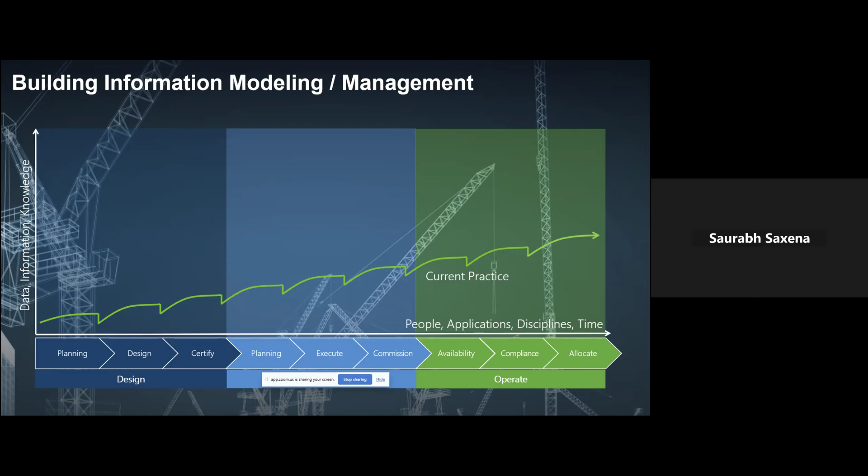So, what do we achieve with that? I mean, the 3D BIM model at the concept stage or visualization stage serves the purpose of data, information, and shareable knowledge between the different people, applications, and different disciplines, along with the time across the project life cycle seamlessly. You can see that in current practice, there is loss of data which results in a lot of rework. But with the connected data environment, the value of this data, information and knowledge sharing increases significantly.

However, the accuracy and details of the 3D model, I am not saying that these can be achieved at the visualization or concept stage, but this can be improved towards the fabrication stage. As you can see on this slide, at the lowest level of detail, 3D models are used for basic visualization and conceptual design. And as the model develops, they are used for conflict resolution, identifying and resolving clashes between structural, mechanical, and plumbing or electrical.

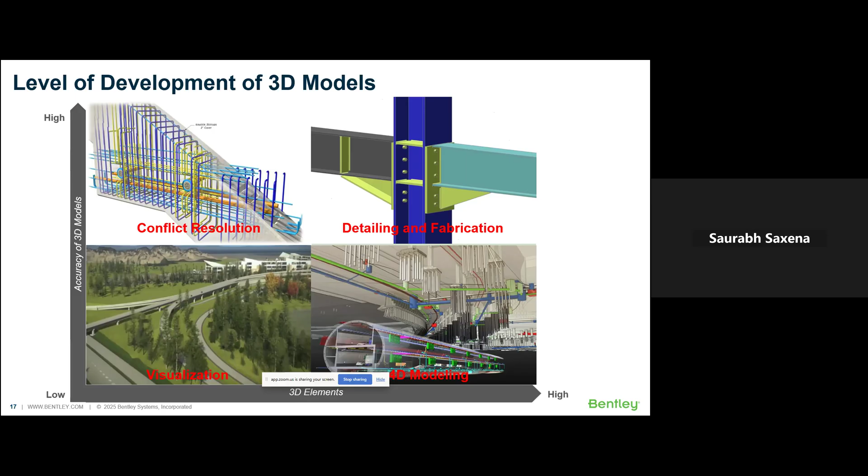And the highest level of detail you can see at the top, that is detailing and fabrication, where the models contain precise information for manufacturing and construction. And if you integrate time as a dimension, then it becomes a 4D model which can be used for construction management as well.

So by now you would have realized that with OpenBridge Modeler, we are trying to achieve, or we are achieving, a connected data environment, that is a seamless workflow irrespective of the discipline and location of the project, people throughout the project life cycle of design, build, and operation phases.

Now, before diving into the OpenBridge Designer integrated workflow, let's have a look at the current disconnected bridge workflow, which you might agree most of the companies are currently following. So what we are doing currently, mostly, is engineers are doing the analytical model and they are designing. Then after designing, whatever results and sections they are getting, they manually transfer the data to drafters. Then drafters produce 2D plans, production, then quantities and detailing. And then that data, after compilation with the engineers and drafters, we manually transfer for the construction and asset management.

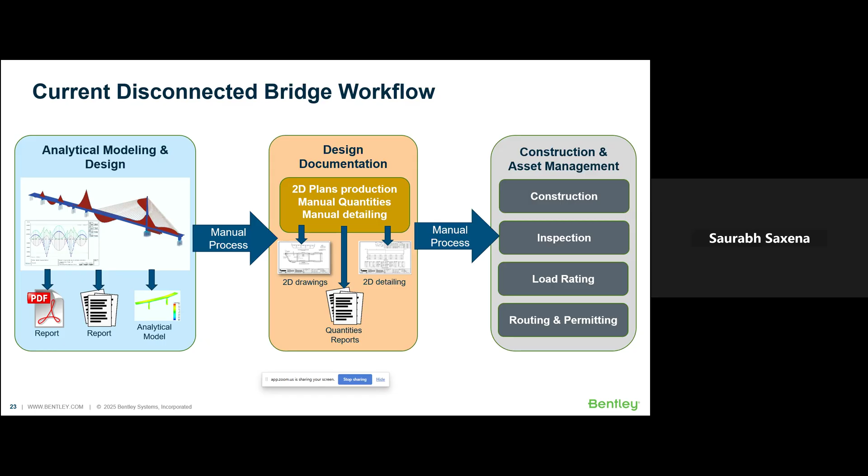But you all have experienced in your tenure as a structural engineer or bridge engineer that this results in a lot of data loss, as well as a lot of rework. And the most critical condition arises when one of the engineers or drafters leaves the company, then it is very difficult to gather that correct data.

Now coming to the OpenBridge Designer integrated workflow. So what is OpenBridge Designer? OpenBridge Designer is a unique application that combines modeling, analysis, and design into one comprehensive bridge product, as it creates a true BIM model, that is a 3D physical model of your bridge from the beginning of your project. The application utilizes the modeling capabilities of OpenBridge Modeler. I repeat, the application utilizes the modeling capabilities of OpenBridge Modeler. There you cannot design and analyze.

And the analysis and design features mean you can design and analyze after extracting that physical model to either LEAP Bridge or RM Bridge, that is LEAP Bridge Steel, LEAP Bridge Concrete, or RM Bridge. So you can see in this slide that we can do the 3D physical modeling. The same model can be extracted for analysis and design, and then the same model can be updated in OpenBridge Modeler for design documentation and geometry reports, 3D models, and annotated drawings. You can also use that same model in ProStructures for detailing the reinforcement, and then the same model can be transferred for construction and management activities.

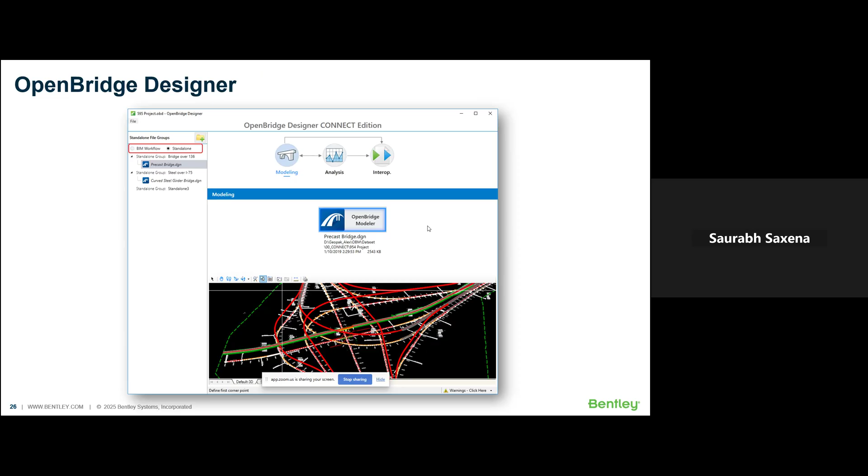You can only create a 3D model, but in standalone workflow, you can even take that model for analysis and design. So in standalone workflow, you can create several groups, and after creating the group, you can create your 3D model in modeling, that is OpenBridge Modeler, and then take that same model for analysis using various tools available in OpenBridge Designer, and these are interoperable.

I mean, the movement can be to and fro. You can take your model from OpenBridge Modeler to analysis tools, and you can update the analysis and design model back to OBM.

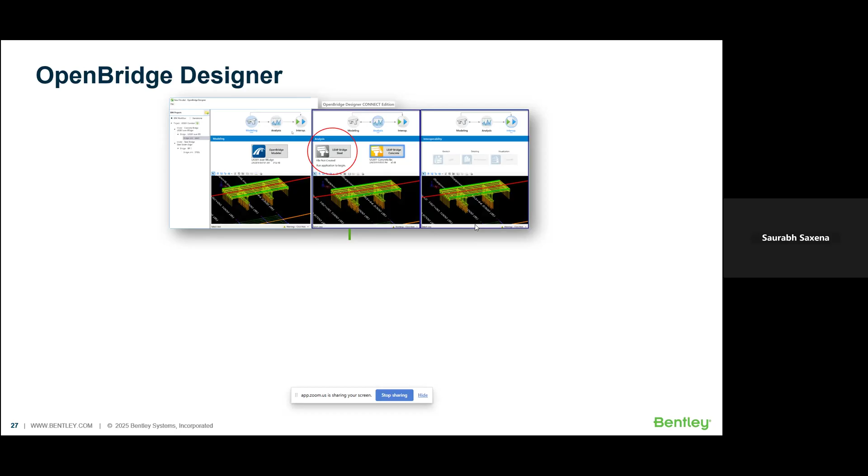So this is the general workflow of OpenBridge Designer. First, you create a model in OpenBridge Modeler. Then, if it is a steel structure, you transfer the same model for analysis and design to LEAP Bridge Steel.

Or if it is a concrete structure, PSC or RCC, you can transfer your model to LEAP Bridge Concrete, where you can do analysis and design. And if it is a complex structure involving many construction stages, like segmental bridges, then you can transfer your model to RM Bridge, where you can design the most difficult bridges you can imagine.

So this video is a depiction of creating a PSC girder bridge on OpenBridge Modeler.

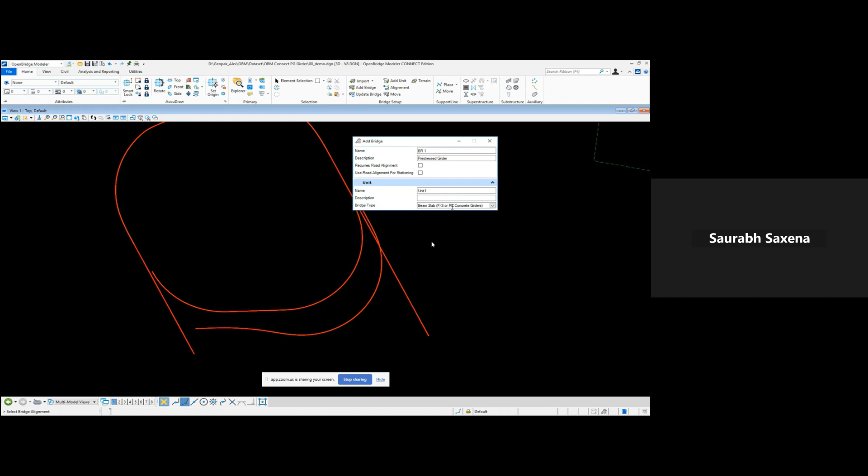First of all, these three lines you can see on the screen are actually the alignment and profile. So for creating a bridge model in OpenBridge Modeler, you need to reference the alignment and profile from the roads department.

After that, in bridge setup, you need to add the bridge. Just select an alignment on which you want to model your bridge. So I have selected the alignment.

You can also reference your terrain model here in OpenBridge Modeler. So all the roadway data can easily be referenced here. See, I have referenced the terrain data as well.

So I have referenced my alignment, referenced my terrain data, and defined my bridge on the rightmost alignment. After that, you need to place the support lines. What are support lines? Support lines are basically the location of your abutments and piers.

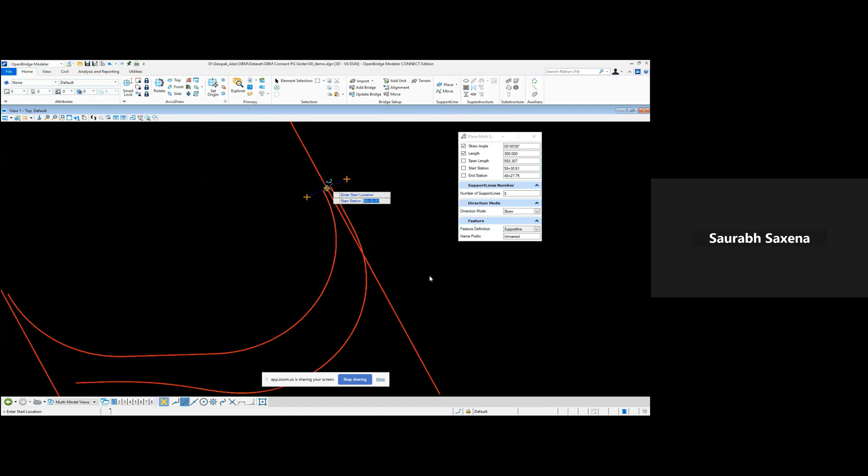So after defining the bridge, that we have defined that prestressed girder bridge we are going to model, we are defining the support lines. Here you need to specify skew angle, length, span length, start station, and end station.

At this point, you need not worry even if there is any change in the spans in between. Just click on this, and this pop-up window will open. Here you can change the name, like A1, P1, P2, and change the span length, so automatically your bridge will set up to the desired location.

Okay, so we have created the support lines for a 7-span bridge. Now you need to place the superstructure.

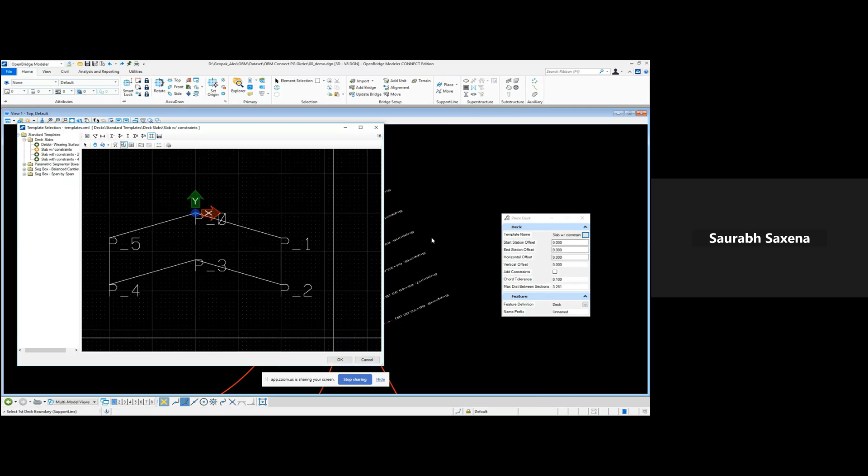So in superstructure, first select place deck. There are various templates available in the library, which you can select from. And if you want to change anything in that template, you can go to the utilities library.

There you can already see some predefined variables, like P1, P2, P4, P5, which are points defined with respect to the origin point, P0. So if you want to change the right half deck width, left half deck width, or slope, you can change it easily from this table.

So here it is as defined. In addition to this, if you want to define a deck type that is not in the library, you can create your own template as well. There is no restriction for that; you can create your own template and define it.

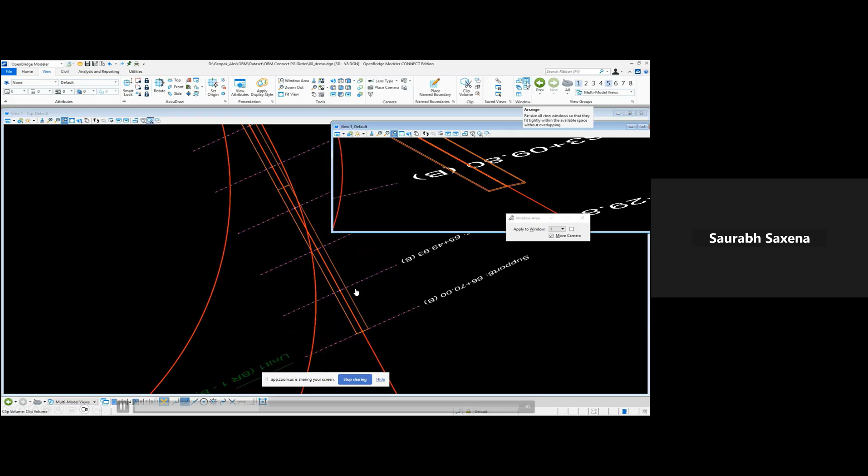So if it is a simple bridge, you have to select each and every support line for placing the simple deck. And if it is continuous, just select the first support line and last support line, then your deck will be placed. As you can see in the 3D view, I have opened two views, one on the left side and one on the right side.

So you can easily place your deck. Now you need to select your beam layout. The moment you select the support lines, this window will pop up, asking how many beams you want to place and what edge distance you want to keep on both edges.

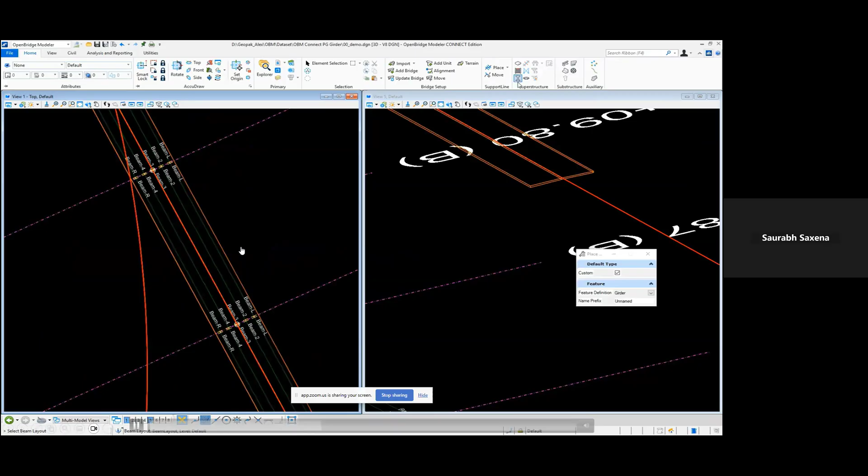You can define that, and even change the beams in between - right beam something else, left something else, intermediate something else - that freedom you have. Just select the beam layout, then you can place the beams. In this pop-up window, you can select the templates or change the template as well.

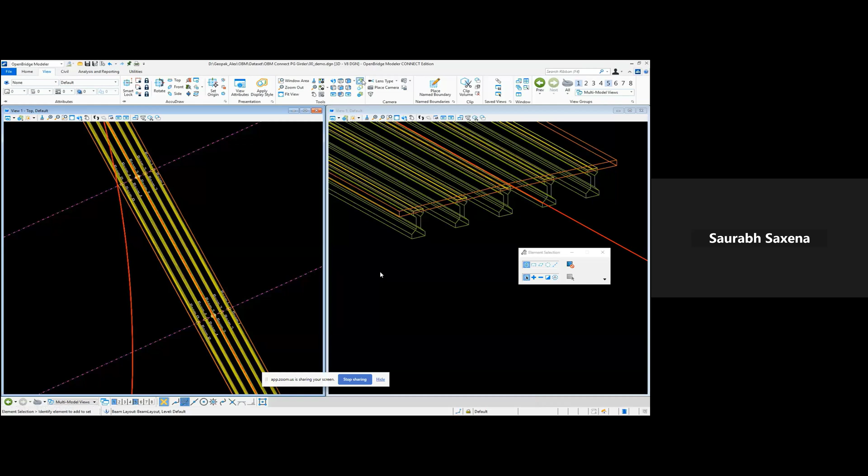So now the beam is placed. You can see in the 3D view, and you can change your view as well - from wireframe you can change to illustration view. There you can see the solid representation of the various components of the bridge. So here you can see what we have modeled till now.

After placing the superstructure - deck and beam already placed - now comes the part of placing the substructure. Go into substructure, select place abutment, select the template. There are various defined templates in the library, and if it's not as per requirement, you can create your own template as well.

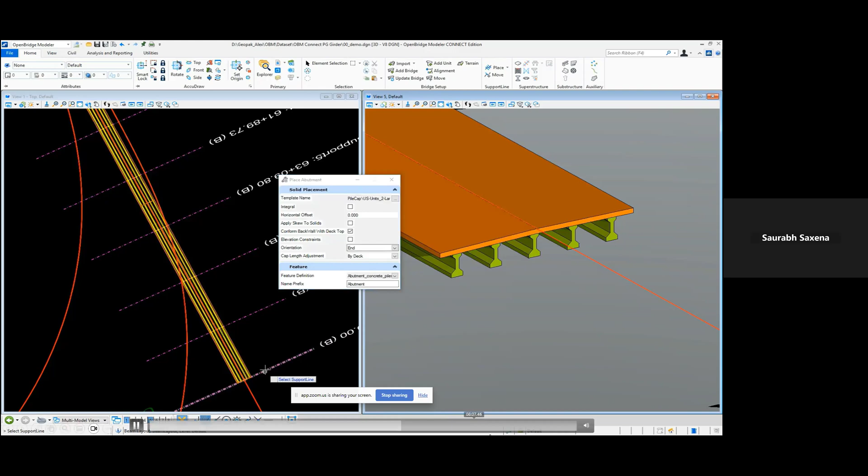You can select the template name from this pop-up window, and horizontal offset if any, conform back wall with deck top, elevation constraint if you want to give. If you have referenced your terrain model, you can give elevation constraint and orientation, whether you want to place your abutment at the start or at the end, and cap length adjustment. You select all these parameters and simply click on the support line where you want to place your abutment, then your abutment will be easily placed.

Same again, you need to change this orientation to start. If you want to place your abutment at the start location, just select the support line again, and your next abutment will be placed.

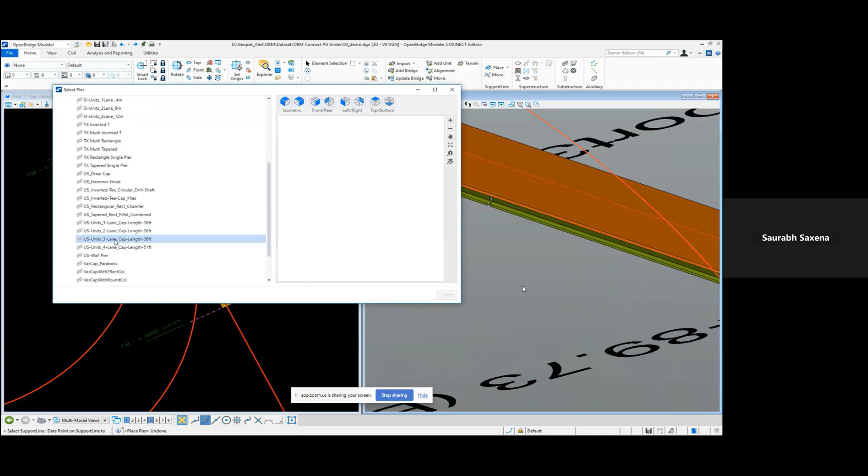Now next comes the placing of piers. You need to go to place pier in the substructure. You can select the various templates available in the library, from multi-column piers, and just simply click on select.

After selecting your template, you just need to define if there is any horizontal offset, cap length adjustment, or elevation constraint, and then click all the support lines where you want to place your piers. You'll be able to place all the piers in one go if they are of the same dimensions.

So now in the 3D view, like this, we have referenced the terrain model. I'm keeping all my footings from the ground at a level of 4 meters below the ground - that is, top of the footing is 4 meters below the ground.

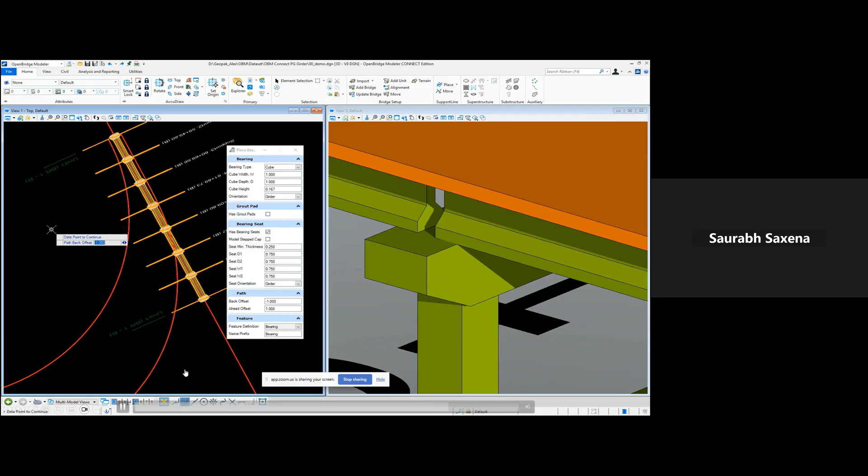Like this, and the seat orientation, and back offset and ahead offset - meaning from the center line of support, where your ahead bearing will be and where will be your back bearing. Just select all the support lines, then your bearings will be placed in a very swift manner. You can see on the right side view, your bearings are placed with the bearing seats.

Now comes the part of placing the crash barrier. In auxiliary, you can select the crash barrier templates if it is there. If it is not there, again, you can define the template as per your requirement and place it on your bridge structure.

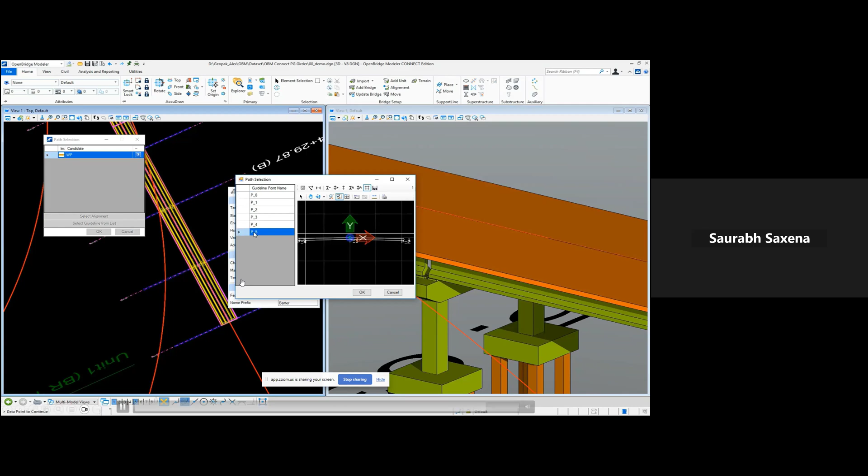You need to select the reference point for placing the barrier. Reference point will be either the right edge of the deck or left edge of the deck. You need to select that point from the select guideline from list. For placing the right barrier, you need to select P1, and for placing the left barrier, you need to select P5. As you can see here, P5 is selected, then the left barrier will be placed.

On the right window, the left barrier is placed. Similarly, you can place your right barrier in your bridge model, and then your bridge model is completed.

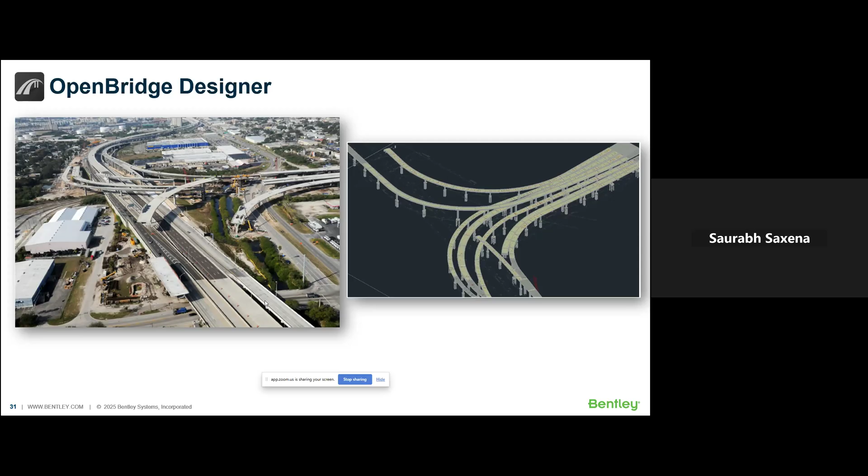So not only can you model your bridge with Open Bridge Modeler, you can also visualize your bridge in reality context. In addition, not only one bridge but different complex construction stages can be handled through OBM by defining build order and as many bridges as you want. So from starting to end, we deal with only one model across the various life cycles of the project.

Now coming to the types of bridges in Open Bridge Designer, we can do pre-tensioned concrete girder slab bridges, steel girder concrete slab bridges, segmental bridges, and cast in place concrete boxes and slabs.

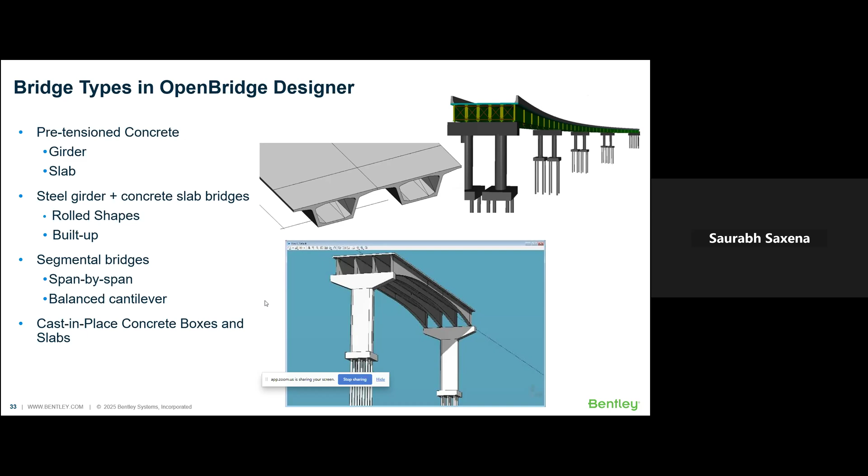As you can see in this slide, you have various superstructure tool sets for modeling plate girder bridges, RCC girder bridges, PSC girder bridges, or PSC box girder bridges using the OBD native geometry tools. And as you have already seen in the previous small clip of Open Bridge Modeler, you have various substructure modeling tools as well.

For abutments, there are options like stem wall, pile cap, and user defined. For piers, there are wall piers, multi-column piers, hammerhead piers, and pile bents. And if you want to define anything else, you can also define it as per your requirement.

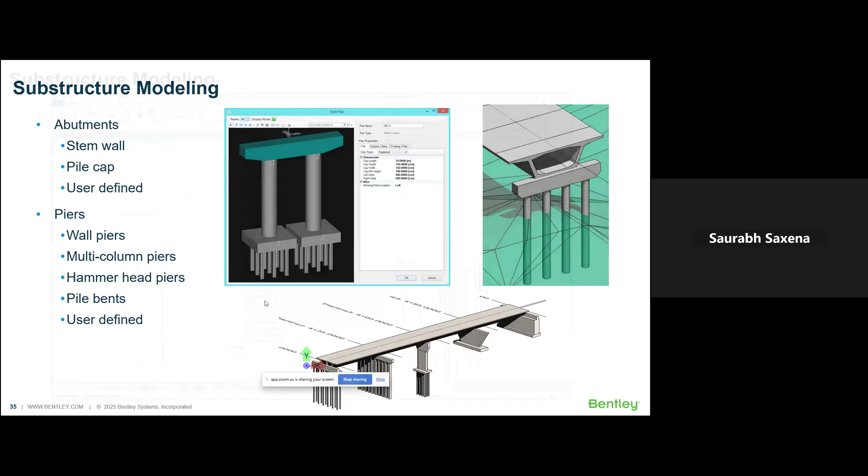Now, one thing I want to cover: if you are creating your own template, there is a very special capability of OBM where you need not define the exact dimensions at that point of time. That means at a later stage, you can change the dimensions of your defined template as well, by defining variables.

As you can see in this clip, we have defined a variable for each and everything: cap left length, cap right length, cap height, cap depth. So if at a later stage in my project I want to change my dimension, I can easily change these dimensions in my template.

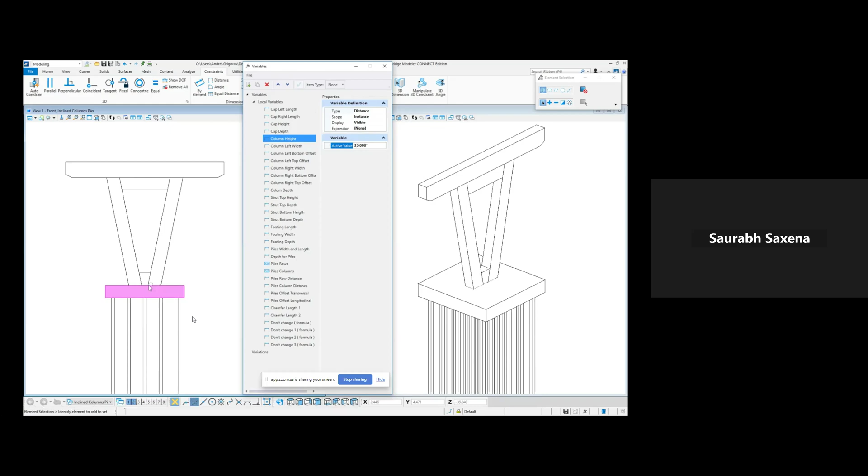Column height, column width, whatever, piles, number of piles, the geometry of the pile, whether you want to make it circular or rectangular - you can change each and everything very easily if you have defined the variables while creating a template. So each and everything you can change very easily with this method.

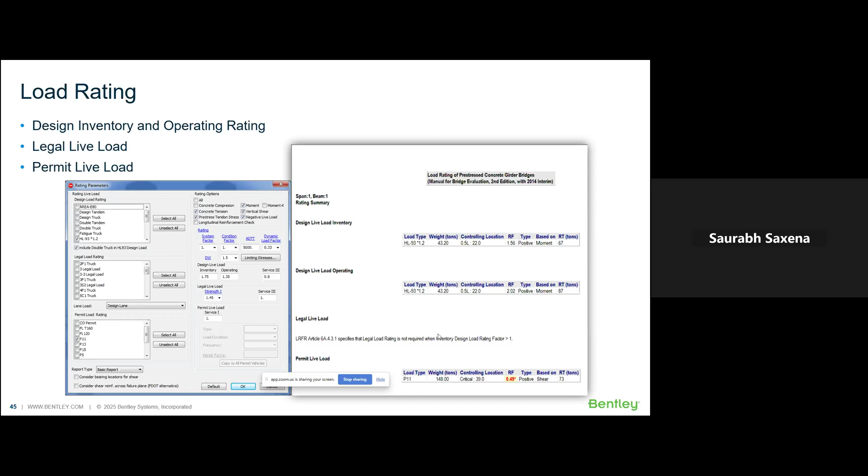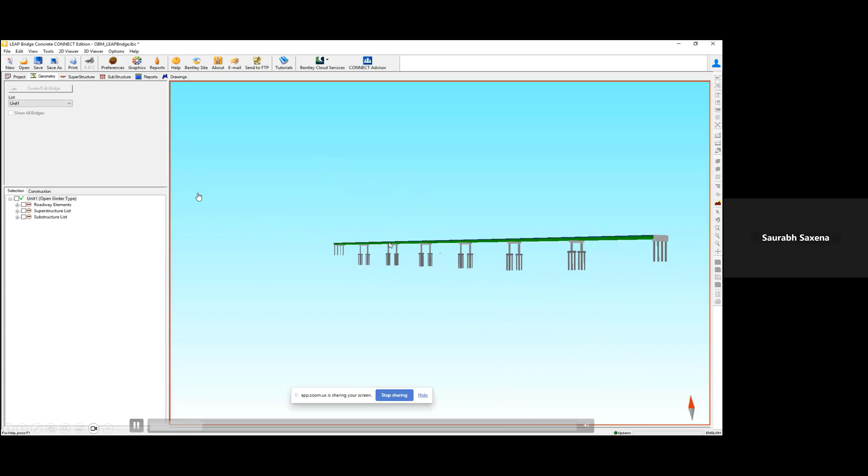In this project, you need to select the design code and analysis option. As you can see at the top, there is geometry, superstructure, substructure, reports, and drawings. So even after extracting your model from OBM, if you want to change anything for design purposes, you can easily modify the dimensions as per your requirement. So going to the superstructure, this is the model which we have transferred, which we have extracted from the OBM.

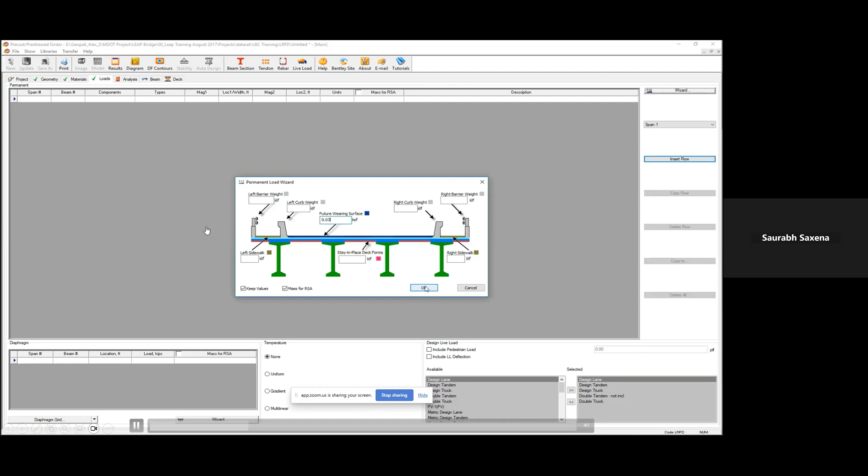Now, going into the precast pre-stressed girder, I have the options to select the design code here as well. And I can go into the geometry, and if I want to change anything there, then I can change. If not, then I can go to the materials and define the materials, even for concrete and pre-stressing steel. This is a very interactive load input wizard.

And then you can go to the analysis, and if you want to change any analysis factor or design parameters, you can do that easily, or else you can directly run analysis if you don't want to change anything. So your analysis is run for various combinations, and this is a very good tool for preliminary analysis. For PSC girders, you can go to the auto design feature of this software. Then you will get to know a preliminary design requirement.

And see, I have auto designed it, and in certain criteria it is not getting passed. So what is the advantage of interoperability in OpenBridge Designer? You will understand here that in LEAP Bridge Concrete only, I'll change my depth of girder, and then again check the design.

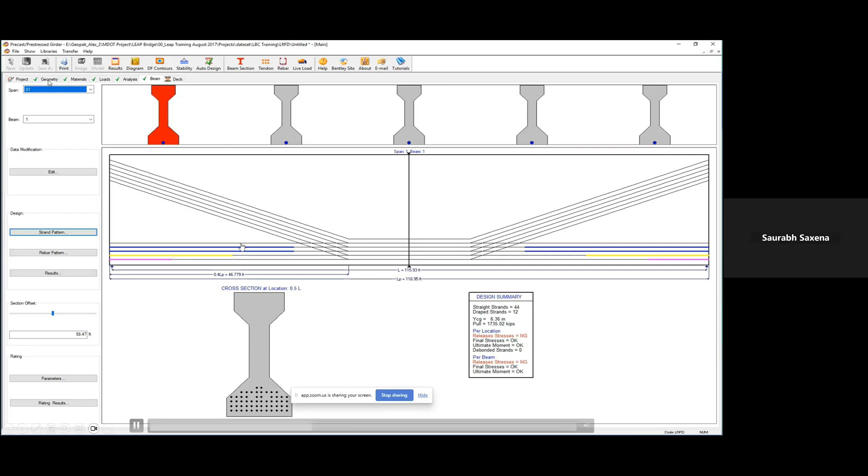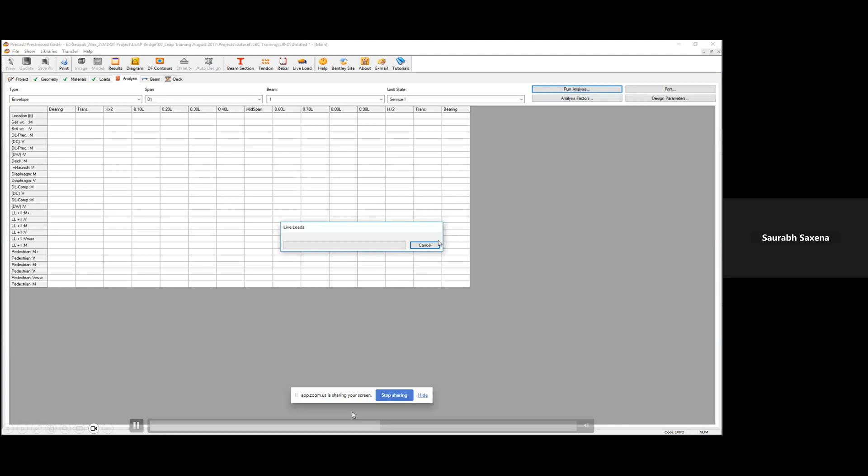See, I have changed my beam template for one span only. For only one span, I have changed my beam template. Then again it will ask for material, loads and analysis. Then I run the analysis. Then go to the auto design feature. Now it is passing everywhere. If I want to keep that strand for all other beams, I can easily copy that strand pattern for all other beams as well.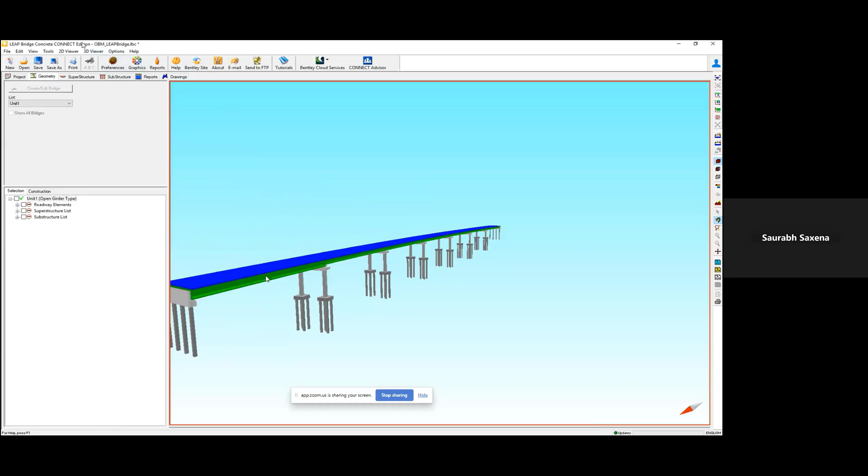So now you can see here, my beam is updated in the first span. And then this model can easily be updated to the OBM model as well. You just need to go into the tools, then OBM sync, then send to OBM. Then that model in OBM will automatically be updated as per the design requirements.

You just need to update that model. We have transferred this model to OBM again. Then go to OBM and update from LEAP Bridge Concrete. See, it will ask whether you have to accept all the changes or not. I clicked on accept all the changes. Then in 3D view, you can see my first span beam depth is updated here.

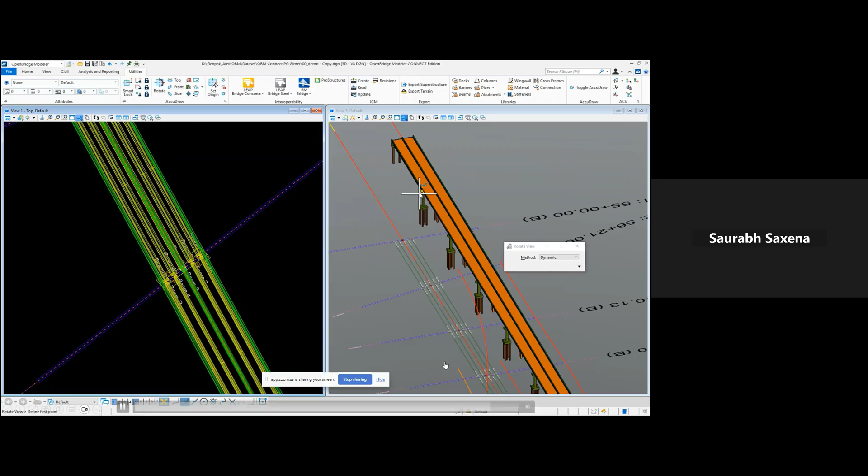It means that whatever change you make in LEAP Bridge Concrete or any analysis tool, it can be easily referenced to OBM again. So there is no manual transfer of data; automatically it will happen.

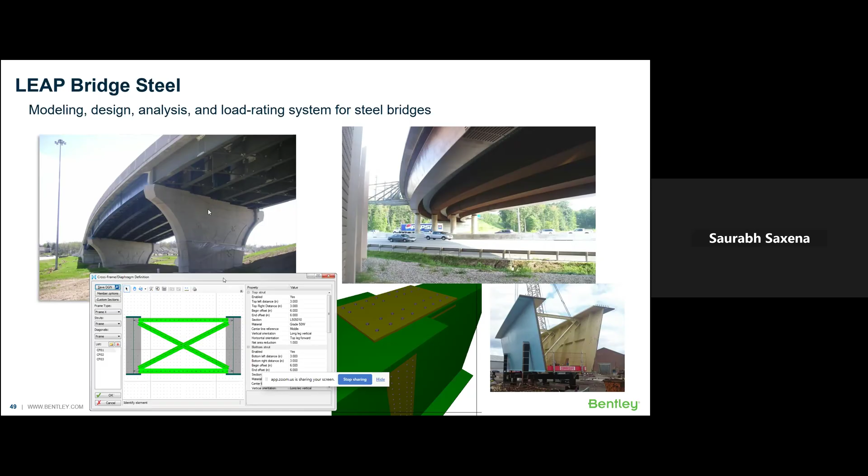Now coming to the second analysis tool, this is very similar to LEAP Bridge Concrete. The only difference, it is used for the simple and continuous spans of steel girder bridges, that is plate girders or tub girders, and load rating of steel bridges, as you can see in this slide. LEAP Bridge Steel has two analysis options. First is line girder and second is grillage.

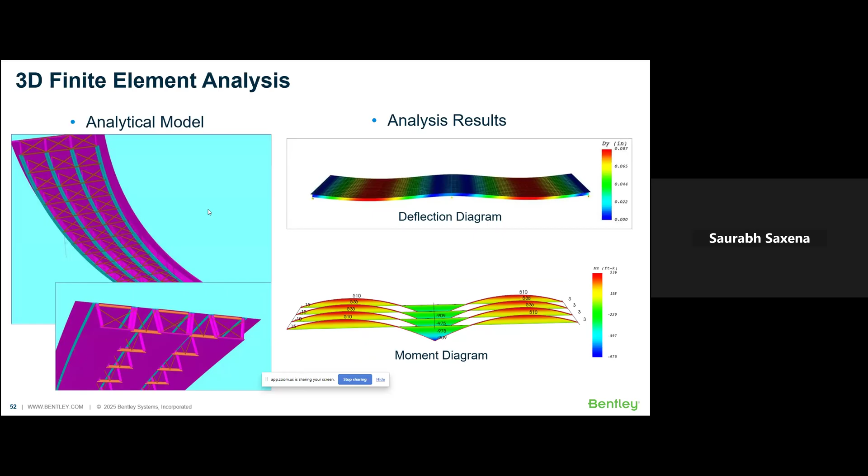After analysis and design, you can create reports from LBS also, that is LEAP Bridge Steel, for section properties, section limits, factored forces, factored stresses, and for various service limit state, strength limit state and fatigue state at various locations. At the nodal points or at the intermediate locations, you can check all that in reports with under and over design, whether the section has passed or not.

In addition to that, the reports have references to LRFD articles and equations as well, and you will have the summary reports finally, whether the section is under design or over design, as you can see in these snips.

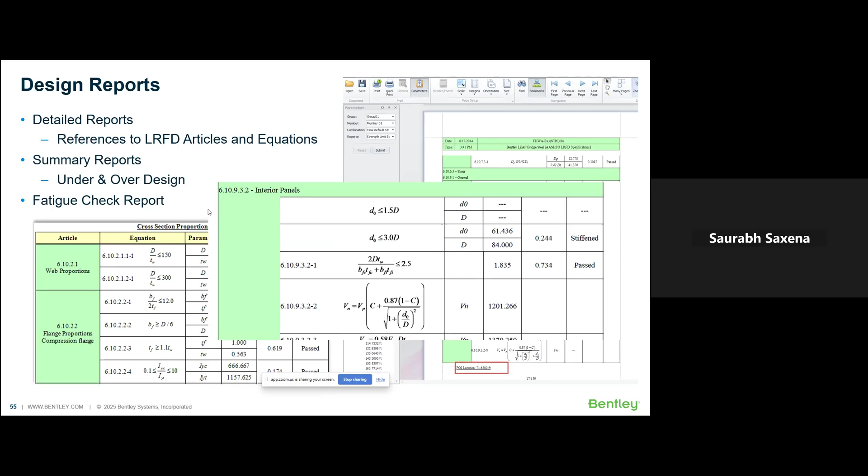Now coming to the most versatile tool of OpenBridge Designer, that is RM Bridge. You can design from simple to the most complex structure in RM Bridge. All the reinforced and pre-stressed concrete structures can be designed in RM Bridge, and in addition to design, you can do the analysis as well.

Steel, concrete, and composite bridges, cable stayed bridges, suspension bridges, arch, truss, whatever it may be, you can analyze and design using RM Bridge, whatever the erection method is, that is span by span, advanced shoring, incremental launching, balanced cantilever, precast, segmental.

So RM Bridge is basically a differentiator because of its unique capabilities. It has 40 years of engineering experience. You can do all types of analysis from static to dynamic, linear to non-linear, grillage to FEM. It supports all the construction methods, whether it is segmental, incremental launching, staged construction, whatever it may be, you can simulate using RM Bridge.

In addition to that, RM Bridge is perhaps the only software that offers a wind tunnel analysis on desktop, and it supports over 20 international design codes.

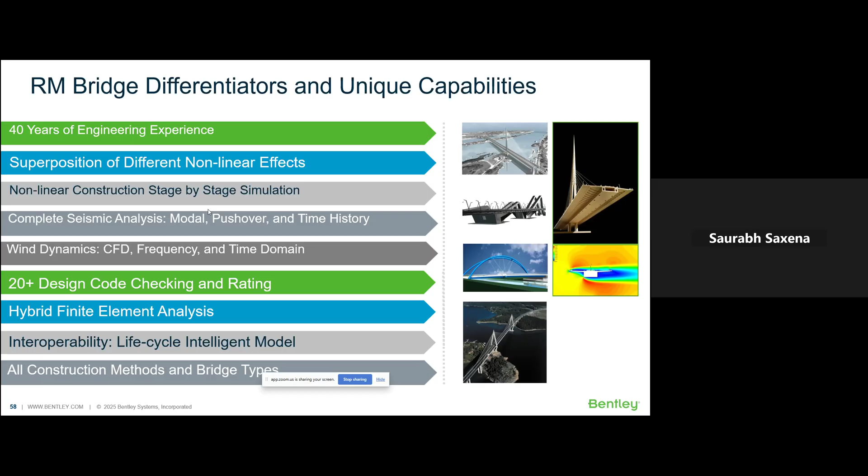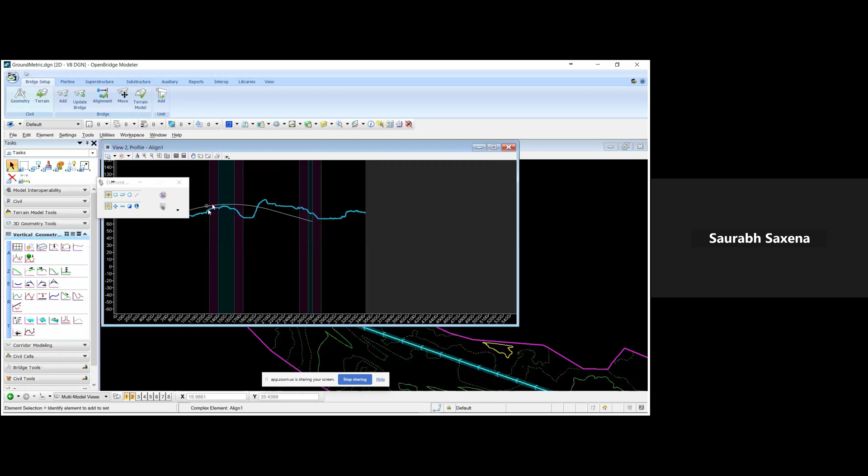So this is again a small video showing the interoperability of OBM, that is modeling a segmental bridge in OBM. It is a balanced cantilever bridge, and then I'll transfer the same model to one of the analysis tools, that is RM Bridge.

So again, I have already referenced some alignments. Then I'm adding a bridge on one of the alignments here. Segmental bridge I have added, then multi lines I am placing, and again, no need to worry, I'll change my span length here, as I already mentioned. Here I have changed my span length, whatever I wish as per the project requirement.

Then go to the placement of decks. Then you can select the template. Here we will place the parametric segmental box. If you want to change anything, go into the library utilities library. You can change the dimensions, as some variables are already predefined. As you can see, I am checking the box depth, everything.

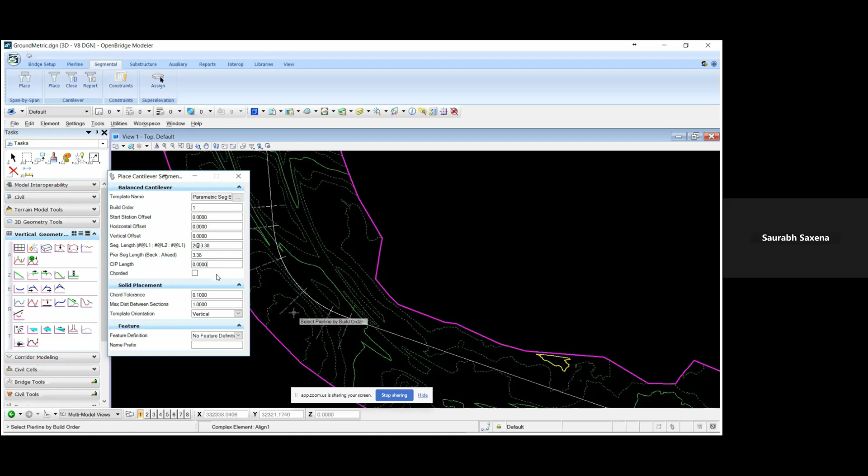And then just go into the segmental, place segmental. First I have selected the segments near the abutment, where they will be placed. So just 2 segments near the abutment I will be placing. And the pier segment length you need to define back and ahead, meaning the segment at the abutment or pier location, which is cast in situ mostly.

So I'll define those and then I'll place my segments other than the closure segments. I repeat, other than the closure segments, I'll place everything in this model. So I have selected the pier. I placed 14 and 14 segments on the right and left side. As you can see, 14 segments of 3.3 meters and 14 segments of 3.38. And this back and ahead segment is 2.4. 2.4 is the segment above the pier.

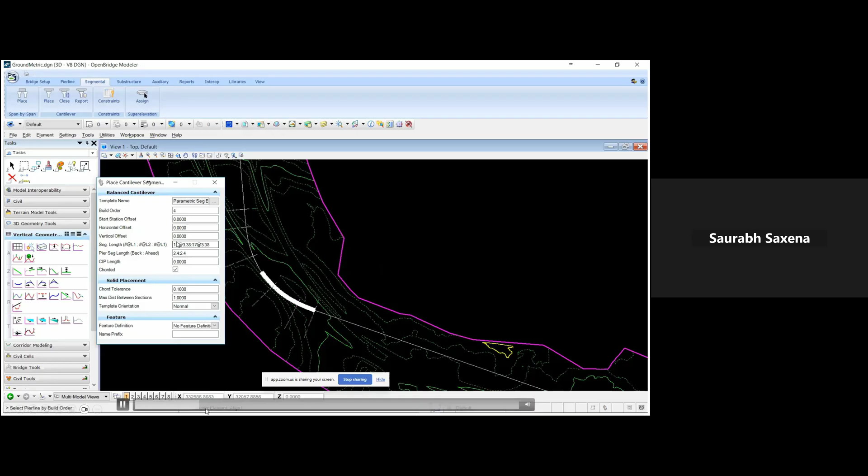Similarly, I will place all my segments one by one, except the closure segments. I need to place my closure segments explicitly, because closure segments are cast in situ, as you may be aware. So now after defining all the segments, see here, this space is cast in situ. So I need to place the closure segment here. I will select place closure, then I'll place the closure segment.

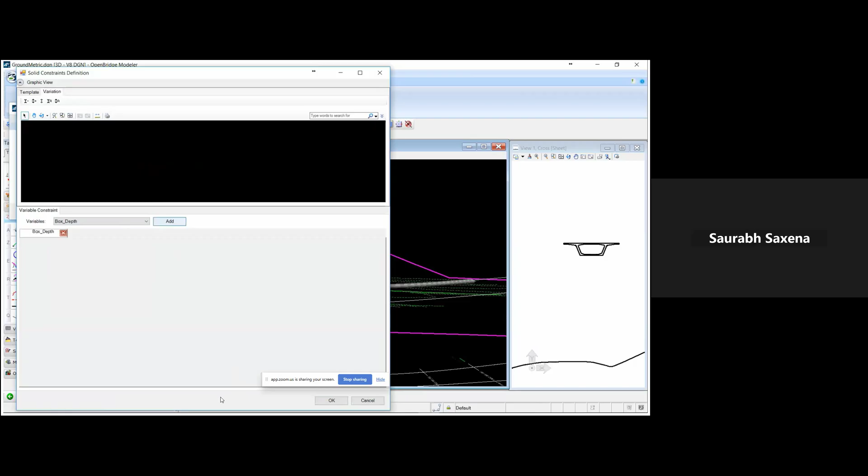One more thing, right now I have followed a constant depth of the box girder throughout my bridge. But going to constraints, here you can see, I have gone to constraints to define any variation in the dimensions of my box girder. So simply I need to select what variation I want to do and then define the variation. Then you will see

now I have defined the variation. See here, your box girder depth is varying with the span length.

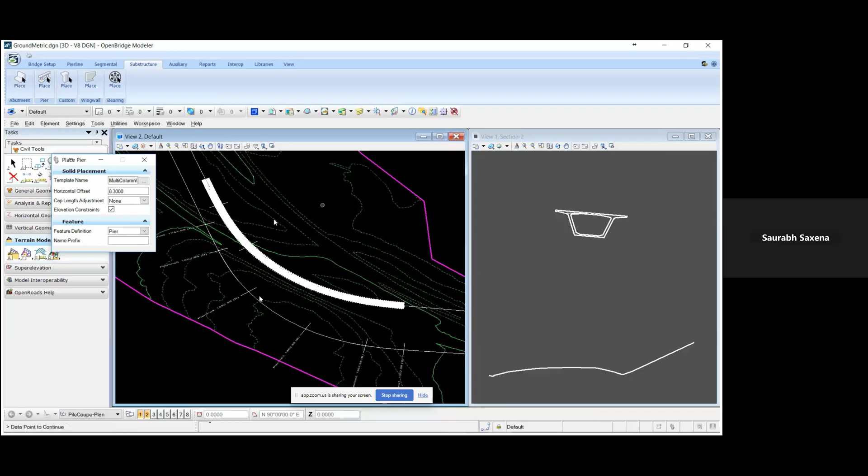Now there comes the placement of substructure. So you need to place the substructure, that is pier and abutment. In the same way, just select place abutment and place pier, and select the required templates. If you have already referenced your terrain model, then you can place your footing as per the terrain model, at what depth you want to place your footings.

So now you need to place the abutment. From pile cap or stem wall, you can select which type of abutment you want to place. Just select the abutment, go to select and select the support line to place the abutment.

So abutments are also placed. Now the last part is to place the bearing. Just select the template for the bearing, define the offsets for the bearing and place it by selecting the support lines. And if it has any grout pads or beam seat, you need to define the dimensions and select the grout pad and beam seats.

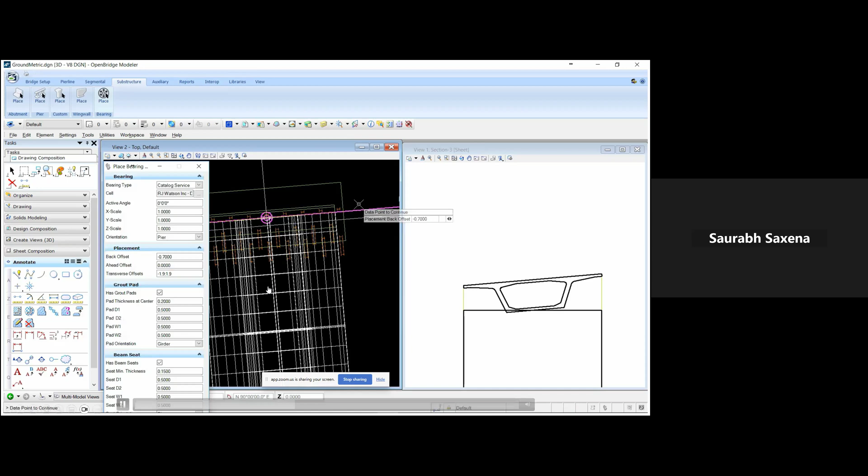After defining all this in this pop-up, you need to select the support lines and just place the bearings. For placing the bearings, these transverse offsets also you need to define: from the center line, at what distance you want to place your bearing, in addition to the ahead and back offset. Similarly, you can place other bearings as well.

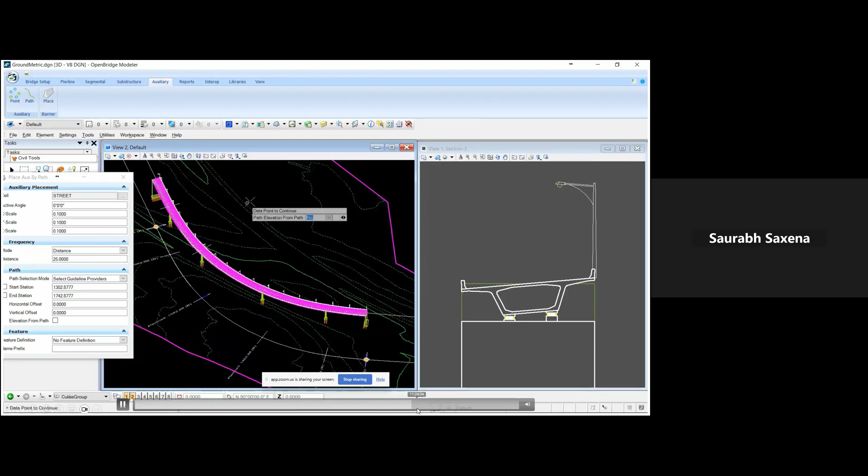So once you are done, in the same way you can define the crash barrier, as I have already shown in previous snips. So once you are done with your model, move ahead a little bit. In auxiliary, you can place wing wall, lightings, whatever you wish, you can place it here.

And here, see, after completing your model, just select RM, send the model to RM. Then this pop-up window will come. I'll pause here. The moment you select send model to RM, this pop-up window will come. So before the model is extracted to RM, the software will ask you to define these things, like the support conditions you need to define here.

For piles also, you can define the spring constants, whatever you want to keep. The supports, whether by default it is as you desired, or you want to change it, you can change everything here. And materials also you can define, and the same will be transferred to RM. So here you can modify your support conditions easily, and materials.

After defining each and everything, you can click on connect to RM, then the physical model will be extracted for analysis and design by RM Bridge. See, that physical model is converted to an analytical model for analysis and design by RM Bridge. Here comes your analytical model.

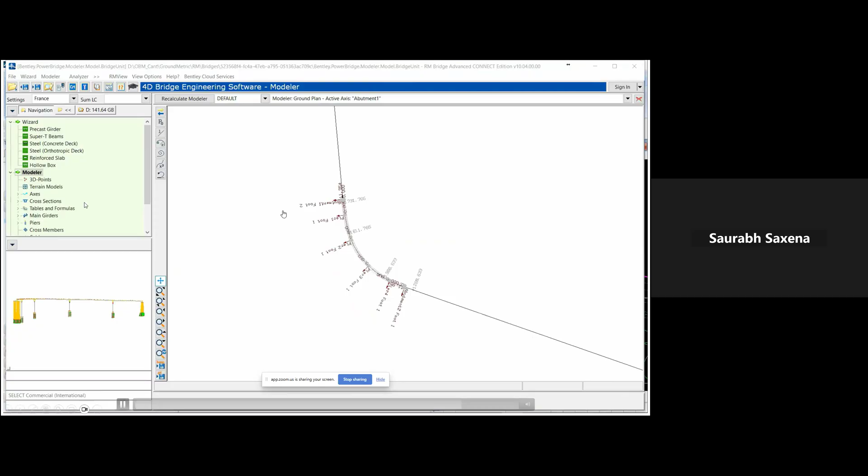So in modeler, if you want to modify anything, like the cross section, or any variation in your geometry, you can easily change it. And in addition to that, if you can see at the bottom, there is reference set. The reference set is basically a collection of cross section reference points and lines for describing spatial cross section properties or geometric entities, like to predefine some points where you want to calculate the stresses.

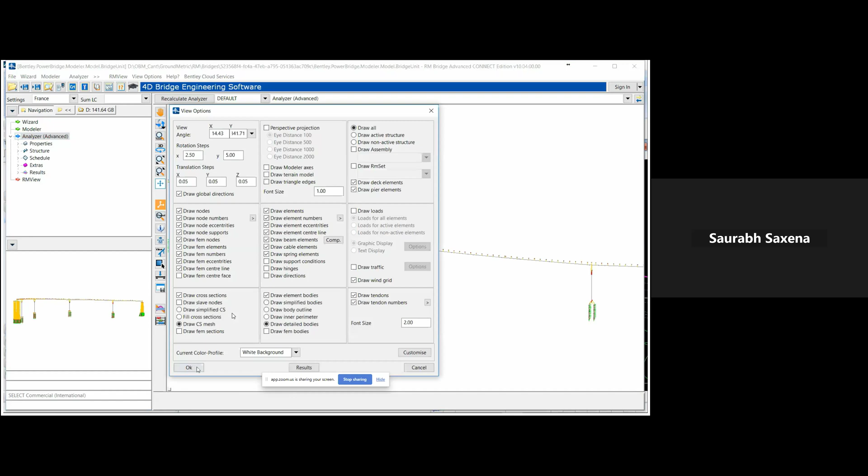So here you can see you have the view options. You can change your view options to draw cross section, draw element bodies. Then you will be able to see the complete 3D view of your segmental bridge. After that, you extract your model to analyzer. There you can define the loads.

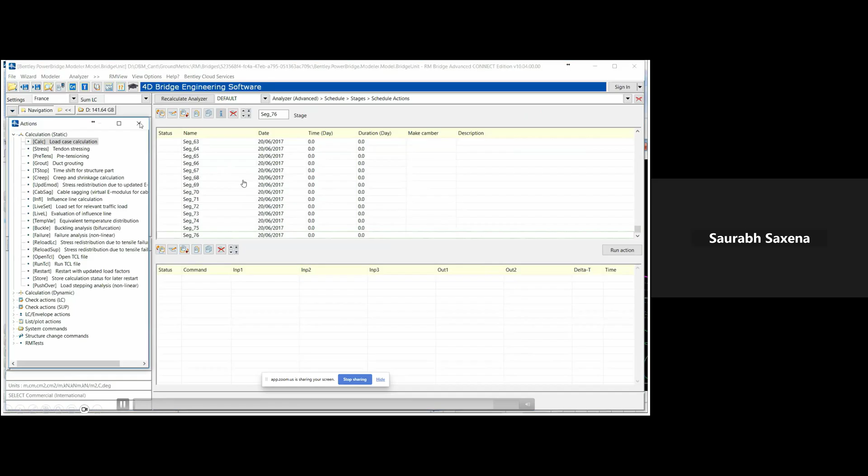Now you have to schedule the actions. I mean, you can schedule your construction stages as per your requirement, and you can activate at different stages. However, I am not considering creep and shrinkage in this snip, so I have kept the time as 0 for everything, but I can define those as well.

So in schedule actions, you need to define at what stage you want the calculation of that load, as per your requirement. So I have defined the calculation of my cross section in the final stage only, because I am considering only self weight. So you can analyze the structure, and after analysis, you can check the results, that is moment results or deflection of the balanced cantilever bridge.

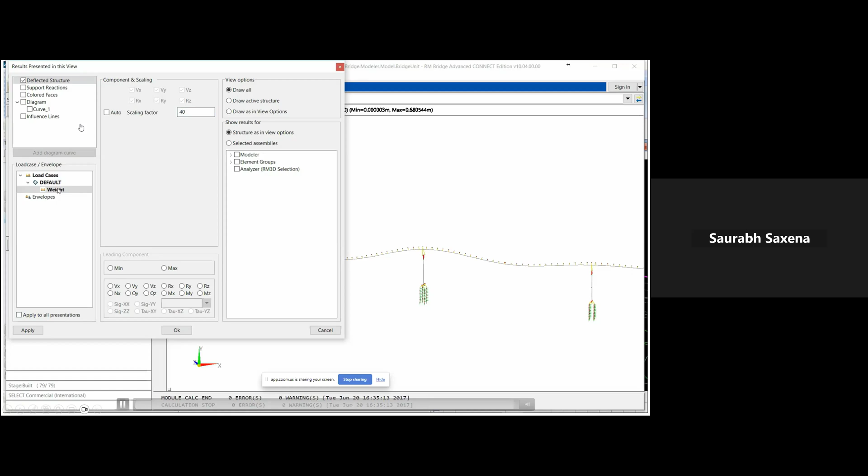So you just need to go to the result view options, select which load case you want to look at and which type of result you want to see, whether it's deflection or moment diagram or shear diagram, whatever you want to see, you can select from here, apply and see. You can see the results with color coding graphically.

So in RM Bridge you can define everything, all construction stages, everything you can handle here in RM Bridge. And all types of result presentation, as I have already shown, that is stresses, forces, displacement, whatever it may be, you can view the results easily graphically.

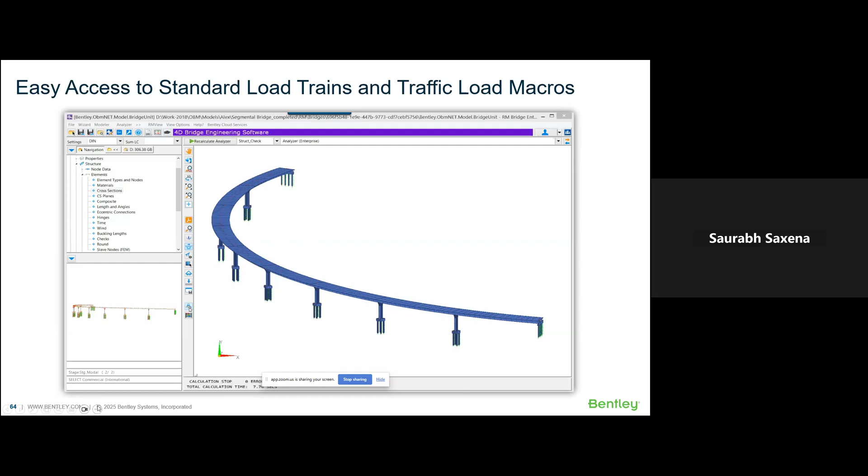In RM Bridge, the load definition of live load is very easy and very interactive. I'll again play a small video. So you need to go into the load definitions, load management, and traffic lanes you need to define for calculation of influence lines. So I have created one lane in the upper table, and see how interactively and graphically you can select the elements on which you want to place your lane. So I have selected my element, and then EY and EZ, that is eccentricity, you can easily define where you want to place your lane.

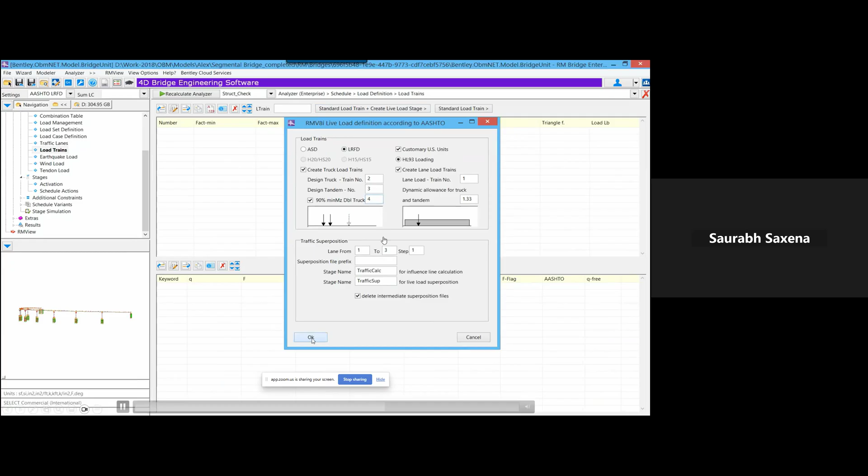Here the lane positions come, then go to load trains. You can select the standard load train and create live load stages as per the different codes already there in the library. It is not mandatory to use this standard load train. You can define your loads as well. Here you can view your loads for live load as per the standard load trains. But by selecting from standard load, the advantage is that in schedule actions, you need not define the various steps. Automatically, all the steps will be created for calculation of influence lines and live load superposition.

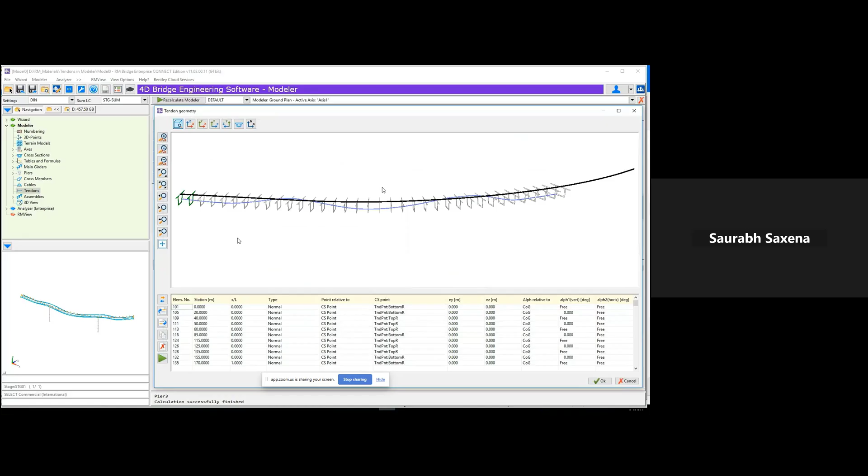You can define tendons very easily and interactively in OpenBridge Designer. You can define them in the modeler part or the analyzer part. You have both options with respect to the cross section point, element, or nodes, whatever it may be. So I have defined a few tendons here. You can see graphically whether your input is correct or not. It is easy to get the feedback. And the advantage of defining tendons in the modeler is that if you insert any new segmentation, the tendon profile will automatically get updated, because it is based on stationing, not segmentation.

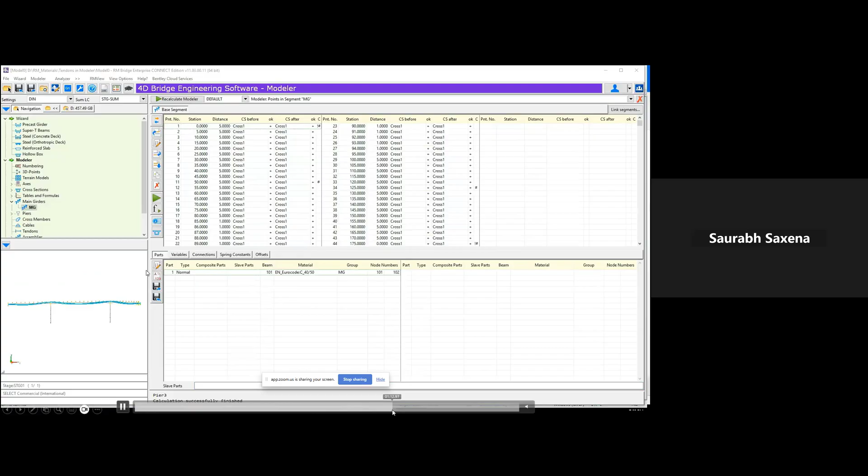You can see all the tendons are defined here. And I am inserting one segment point here. So automatically the tendon profile will get updated. So this is the tendon definition you can easily define using RM Bridge. In addition to that, variable deck width along the bridge can be easily defined. The deck with variable super elevation can be defined.

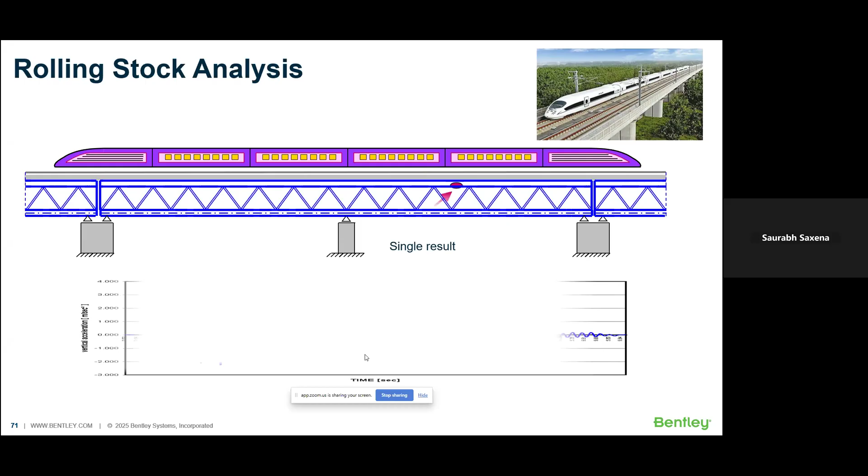Now coming to a different aspect of RM Bridge, RM Bridge can also handle rolling stock analysis, sometimes known as RSI analysis. So for rail bridges, RM Bridge provides a unique calculation engine that will simplify the given structure and apply to it several trains at several speeds. This process, in several phases where the bridge structure becomes more complex, will reduce the scope of trains and speeds. So at the end, the bridge in its complex structure can be analyzed using the worst train at the worst speed to get the maximum response expected of the bridge. This advanced function is largely used for high-speed trains across Europe.

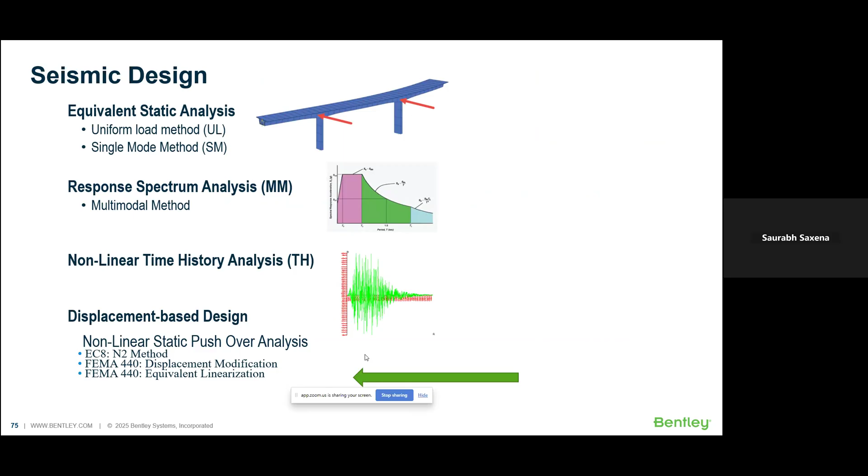Now comes the most interesting part for bridge engineers, seismic design. You might be thinking Saurabh should tell first what type of seismic analysis RM Bridge can handle. So I'm happy to let you know that RM Bridge can handle all types of seismic analysis. As you are aware, there are two different types of seismic analysis. One is force based and another is displacement based. Currently, mostly force-based analysis is used. It may be equivalent static analysis or response spectrum analysis. And for complex structures, we may use nonlinear time history analysis as well, if it is a complex and important structure in poor ground condition.

In addition to all these, displacement-based seismic design is also supported by RM Bridge, that is, nonlinear static pushover analysis can also be done with RM Bridge. RM Bridge offers several dampers and isolators as well. Three damper types are offered: viscous damper, Kelvin-Voigt damper, and Maxwell damper. And there are three types of isolators offered: lead rubber bearing, bilinear hysteretic, and friction pendulum.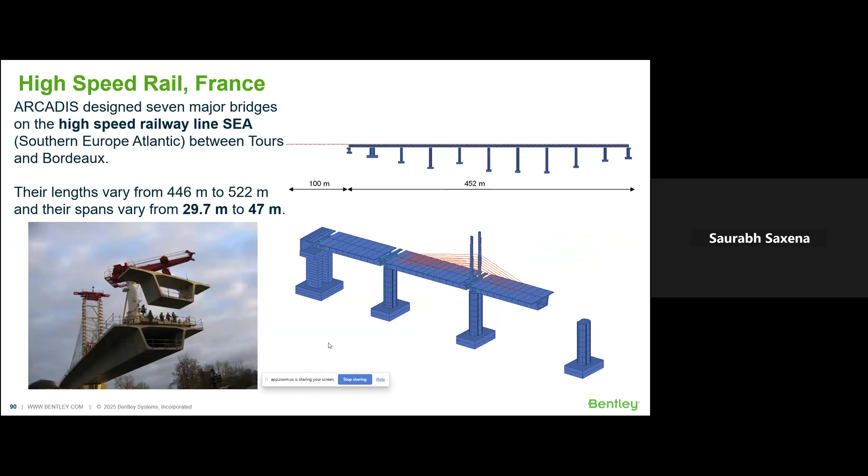Now coming back to the final deliverables which bridge engineers need to submit after all the design, analysis, and modeling: reports. Here comes the most important part, not that hectic, but most important part. So after doing all the analysis and design from OBM, you can create the various quantities report, that is concrete cost estimate. If you define the unit price for the various materials, you can create the cost estimate as well. Various geometry reports, deck elevation reports, beam seat elevation, pier elevation, whatever it may be, you can create with a single click. So this is a small snip.

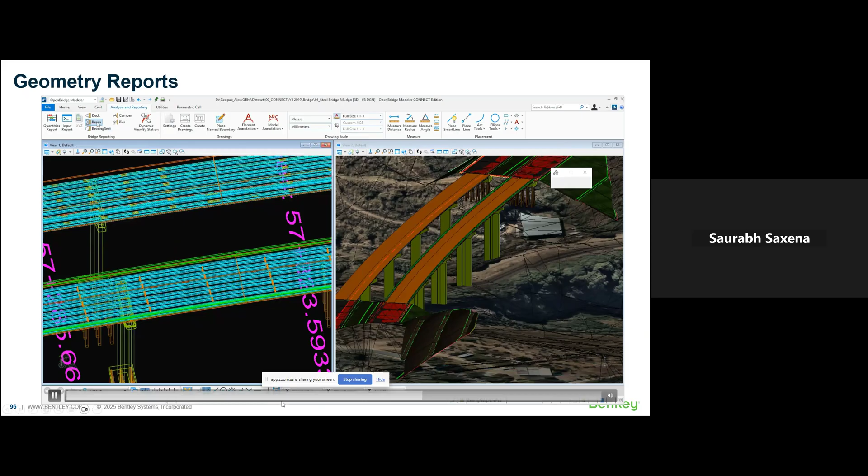I have extracted the model again in OBM after analysis and design, and then I have gone to the analysis and reporting and created some geometry reports just by a few clicks. As you can see here, this is the deck elevation report showing the station elevation offset. This is beam elevation report, and you can select from in bearing seat elevation report as well.

This is same analysis and reporting. You can create the quantities and cost estimate report. Just you need to select the bridge and submit. And see, you will have the superstructure, substructure quantities along with the cost. So with few simple clicks, you can create the quantities and cost estimates.

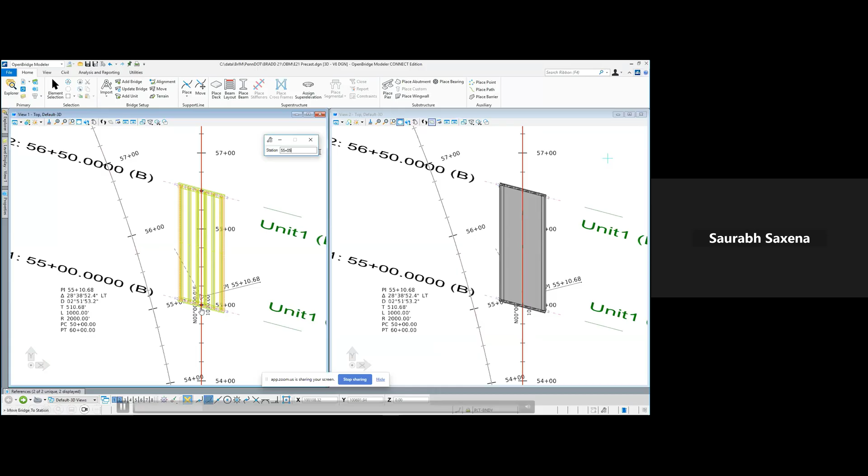Now comes the most important part and most amazing part of OpenBridge Modeler: managing design changes in OpenBridge Designer. Here, as you can see, I want to move my bridge a bit ahead. So just I have to click the point or station from where I want to move ahead and select by how much length I want to move ahead. With few simple clicks, in few minutes, I can change the location of my bridge easily.

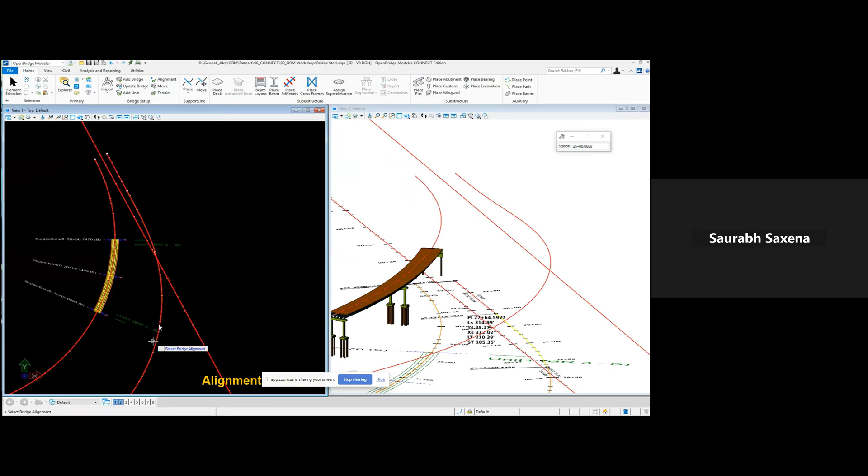Here, if you want to change your bridge alignment, I mean, currently the bridge is on the leftmost alignment. Now I want to shift my bridge to this, sorry, right curved alignment. So just go to the alignment in bridge setup like this and select the new alignment on which you want to place your bridge now. So automatically within few seconds, you will get your bridge on the updated alignment.

Now, if you want to update your bridge elements, you can see in this video easily. You just need to click on the elements, like here in this pier dimensions I want to update. So this pop-up icon will occur. Just after that, I need to select the substructure template, and here I'll see the cap, columns, strut, footings, whatever dimensions I want to change. I can simply change it here. I can change the geometry as well. I want to make my column now circular. I can change it. I want to make the second column as well circular.

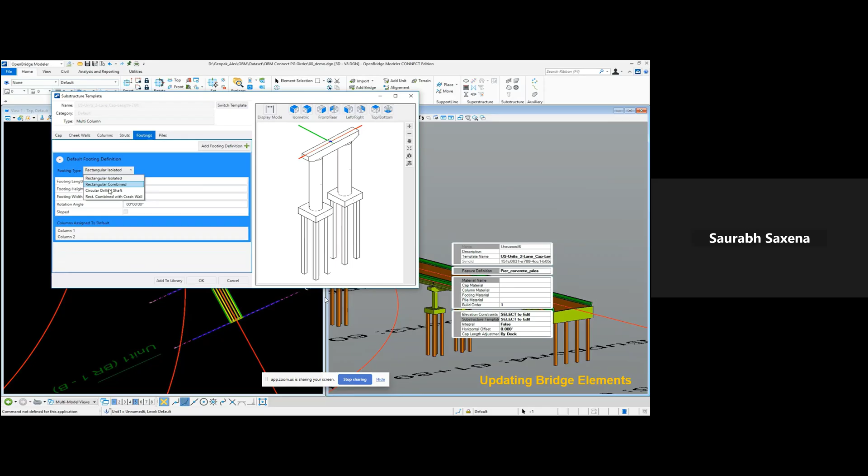I change the footing from isolated to rectangular combined. I want to change my piles as well, that is its geometry from rectangular to circular. And I want to change the pattern of the piles as well. So I can just click on the pattern layout. If I want to make it manual, that also I can do manually. I can enter the coordinates of the piles, or else I can update here as well.

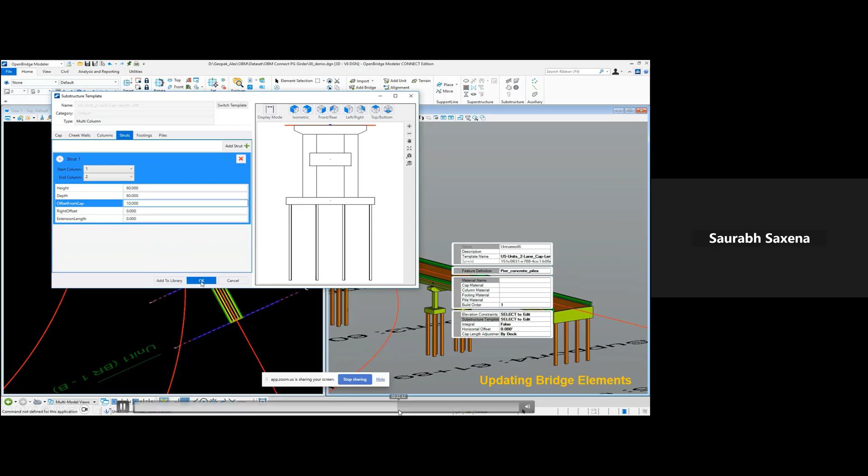That is, what top margin I want to keep, what bottom margin I want to keep, number of rows, number of columns, whatever it is. So just in few minutes, or few seconds I would say, I can change these things. You can see I have changed. One important thing I want to tell you: when we are changing this, there are two options. See, add to library, or OK. If you click on add to library, then the template in the library will permanently get updated. And if you click on OK, for this purpose only, the dimensions will be changed.

Elevation constraints: if there are any hindrances at the site and the contractor is asking you to move your footing upward or downward due to some utilities, you can do it easily with OpenBridge Modeler and pass on the same model to different stakeholders.

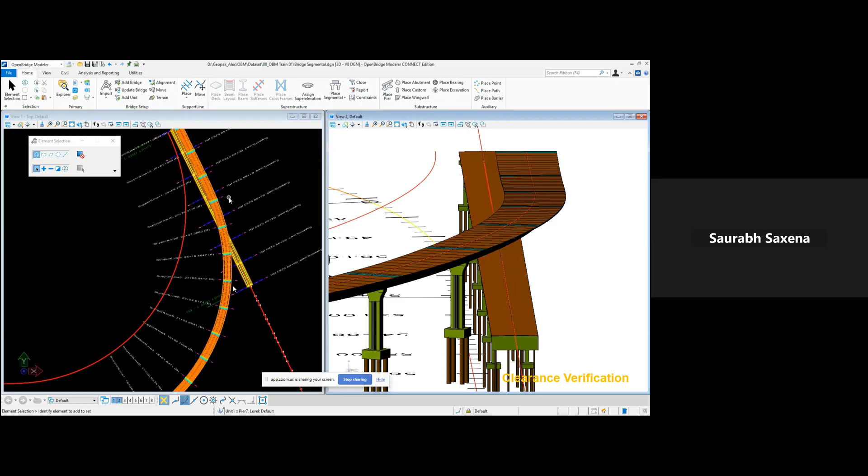This video shows that you can do the conflict resolution, or here I am showing the clearance verification. I am having one bridge above another bridge. So I want to check whether the minimum clearance guidelines are satisfied or not between the bottom of the pier cap of the upper bridge and the top of the deck of the lower bridge. So you just need to go into the utilities.

Here you can see I want to check the clearance here. You just need to go into the utilities and then clash detection.

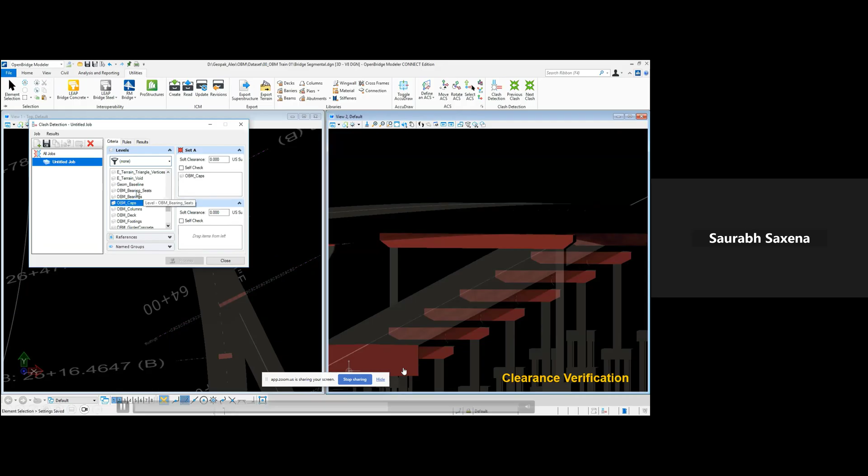Here you will be asked to create one new job. You have to select the two sets in which you want to check the clash or clearance. So I have selected set A as OBM caps and set B as deck. Now I'll define the clearance, so a report will generate whether that clearance is there or not.

Then I can toggle with few surroundings, and I can also isolate that part in which my clearance is not satisfied. So easily you can resolve these clearance issues as well.

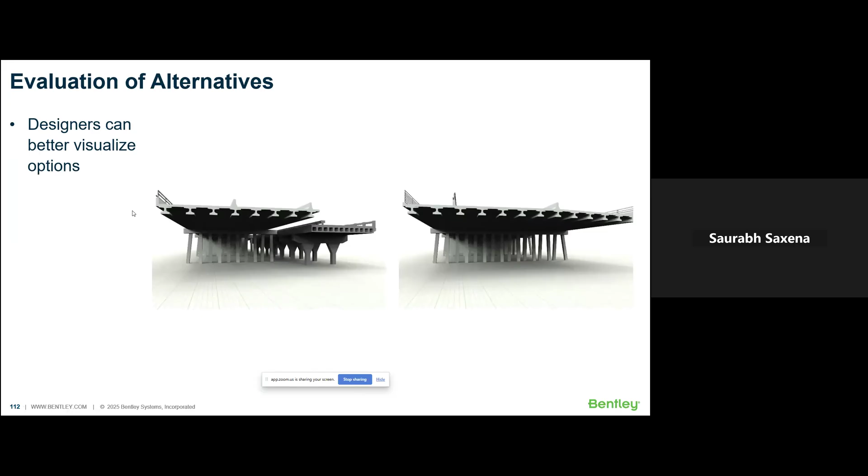Now this is one of the most important parts for those involved in tender activity, pre-tendering work, or evaluation of alternatives. So I feel by now you would have realized that this product is going to save a lot of time and complete the project with more accuracy. In addition, it is very handy if you are evaluating two alternatives for a tendering purpose.

So you just need to create two models on the OBM and define the materials and unit properties. Then easily you will get the quantity and cost report for superstructure and substructure, in a very swift manner.

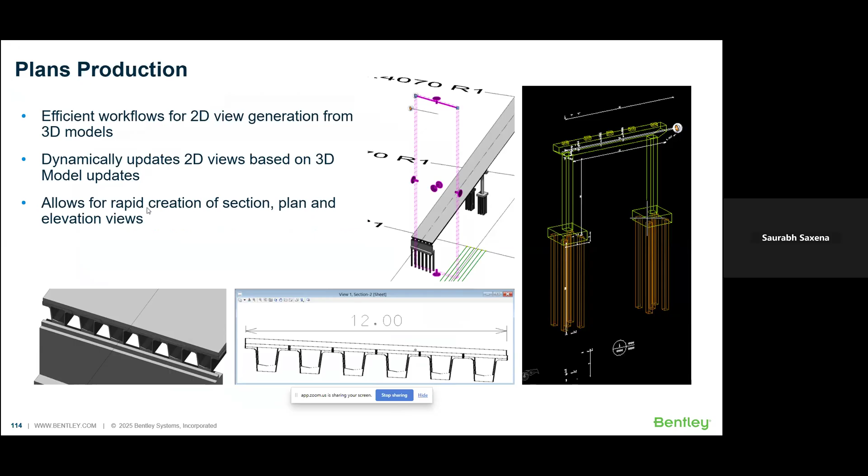Now comes the plan production part. Not only analysis, design, and managing design changes, but all those quantity reports - you can also produce the section, plan, elevation, and 2D drawings from the 3D models using OpenBridge Modeler.

So this is a small video showing the drawing generation. I think there is some issue in this, so I'll skip this for now - it's not playing.

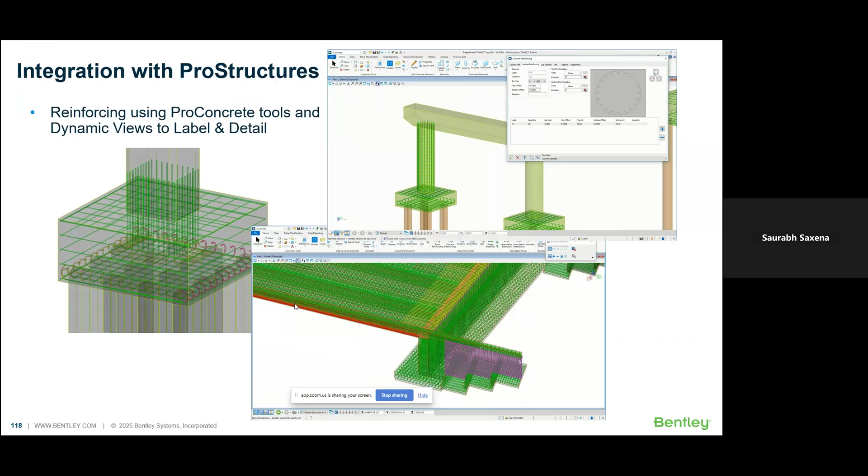Coming to the next part, OpenBridge Modeler models can easily be integrated with ProStructures as well. You can easily model the rebars with ProStructures, and eventually you can create the bar bending schedules as well.

So with OpenBridge Designer, lastly, I would say that you can really deliver a 3D digital delivery for bridges, because all the Bentley software - OpenBridge Designer, ProStructures, Synchro - which are required at different phases of the project life cycle, saves the file in DGN file format, and you can share it with different stakeholders and agencies involved.